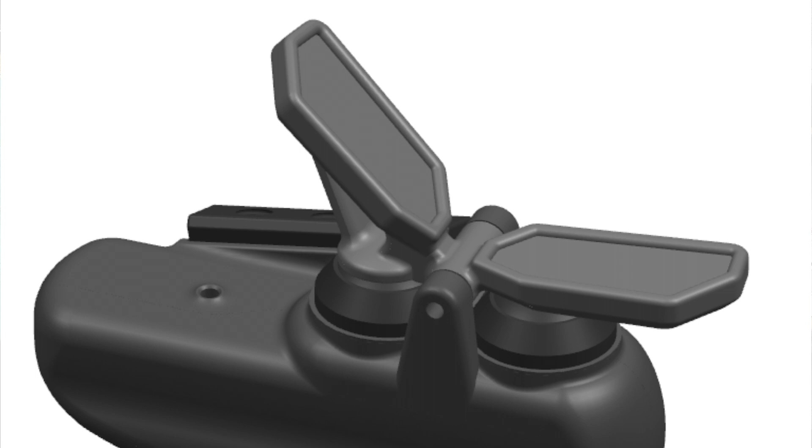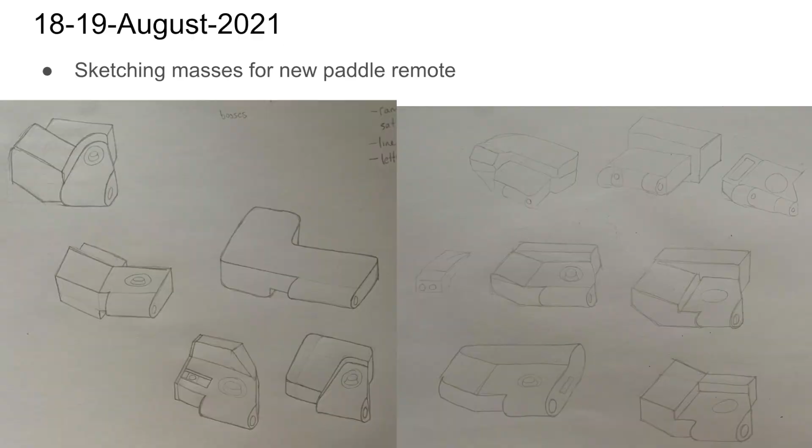So early on in 2019, we decided that we wanted to build a paddle remote. We knew that the ergonomics and the performance gains and the similarity to what folks were used to on their bikes really was going to be the driving factor here. So we started out, built some prototypes, and we're pretty stoked there towards the end of 2019. As you may or may not remember, things went sideways in 2020 for everybody. So in 21, we put together a team. We brought in some new engineering resources, and we started to really focus on the paddle remote in earnest.

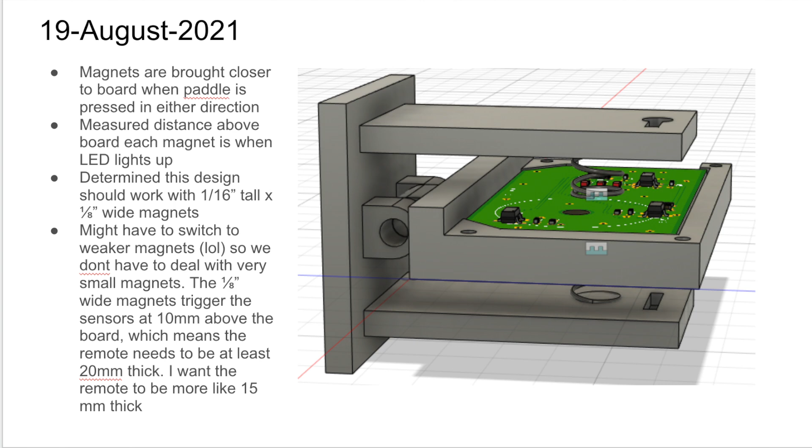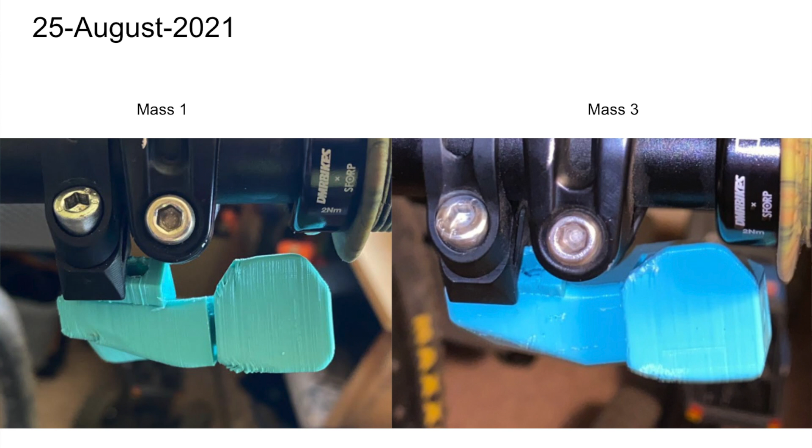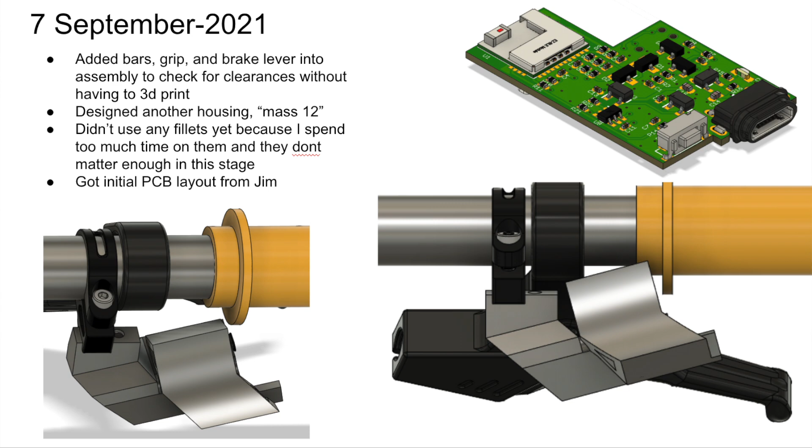Now, one of our other engineering clients that we were doing some work for was using Hall effect sensors to do some of their sensing and their switching technology. So we realized that using a Hall effect sensor, which is effectively a little sensor that gets triggered when a magnet passes over it, we figured that Hall effect sensors could be a great way for us to seal the entire enclosure of the paddle remote and then just use a magnet to pass over the surface of that sensor and trip our switches. That gives us a sealed design, and it gives us an opportunity to keep water and dirt out of the housing and away from the electronics.

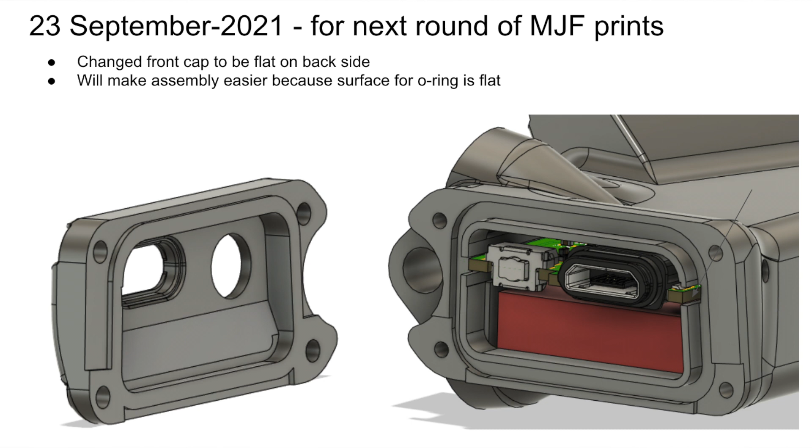We also embraced new 3D printing technology for this design. Multi-jet fusion 3D printing from HP is a nylon 3D printed material that allows us to really do crazy designs. We can have overhangs and pockets and random wall thicknesses, things that you normally wouldn't be able to do with injection molded plastic. We can do that with our MJF. So we put all that together in late 2021, built out some prototypes, showed them off at Sea Otter, and folks were really stoked on this thing.

One of the cool things that we've incorporated is USB charging. There's a small door here where you can plug in a micro USB cable and charge up your remote. The remotes get about 50 hours of runtime between charges, and charging usually takes about 25 to 30 minutes. All paddle remotes come with micro adjust enabled by default. There's a small button on the back. Press that button while you're riding, and then the paddle will step the current gear in or out by 1/4 millimeter increments.

And finally, we've got a Cerakote coating around this. Cerakote is a durable, ultra-thin ceramic-based coating that is very scratch resistant and UV resistant. The Cerakote also gives us the ability to do colors. So you can see I've got the green here, we've got blue, red, gold, and graphite black. We can also do custom colors, and just contact us and we'll get you some more information about that.

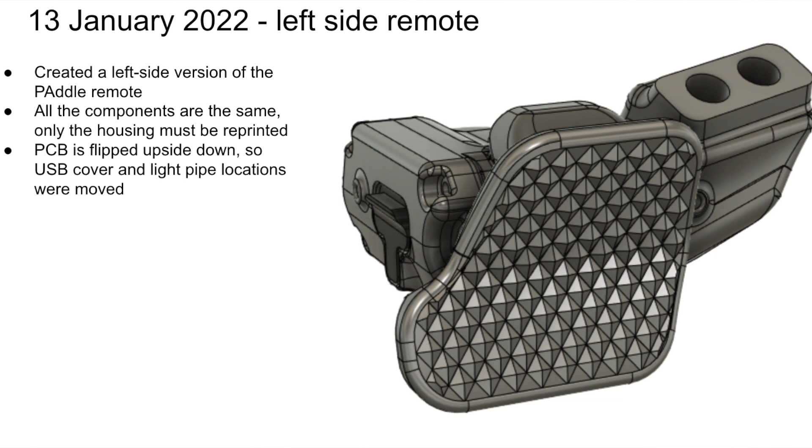Another really cool thing about the technologies that we have embraced here, the MJF and the Hall effect sensors, is that we now have the ability to flip this design over, have a left-hand remote that is identical, gives you great ergonomics over on the left-hand side. I think we're the only company out there making an ambidextrous electronic shifting system for you.

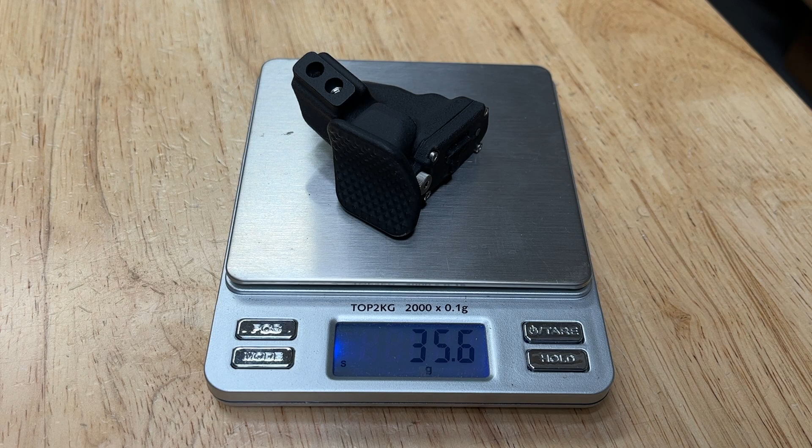Another thing to note is the weight of the remote. So just the remote alone is about 36 grams. Once you add in the clamp and the bolts and all the mounting hardware, you're pushing about 50, which is far less than the folks over at SRAM. Their bare remote is 70 grams.

All right, that wraps it up. Short and sweet. The new paddle remote from Archer Components. We're shipping pre-sales this week. We are so excited to see these out on the trails near you.